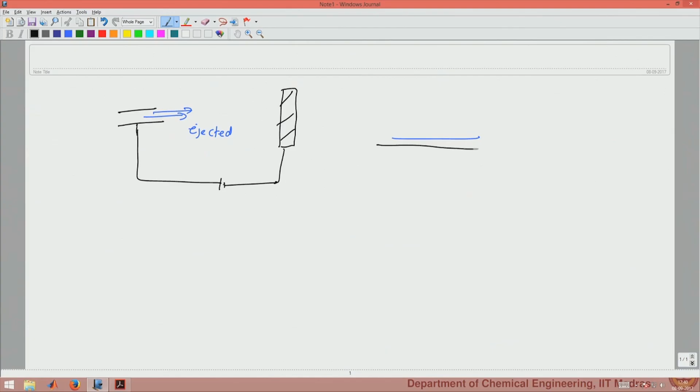This porous film is useful, as I said, in terms of various applications such as biomaterials and filtration. In this kind of problem, flow and rheology is extremely important, because our idea is to get a very uniform diameter of the jet that comes out.

Depending on the stability of the jet, there might be a regime in which the jet will have a few places where the diameter is large. Basically bead formation or spherical regions are formed in an otherwise cylindrical jet, and clearly this will modify the nature of the porous membrane made later on. If these are not well controlled, then electrospinning as a method yields a material which is not very well controlled.

In general, it is of interest to be in the regime without bead formation, and the possibility of this regime depends on several factors, and rheology is one of those. For example, it may depend on the flow rate used, and also on the surface tension of the fluid with respect to the surrounding medium. Based on all these, rheology of the material will determine what regime we are in.

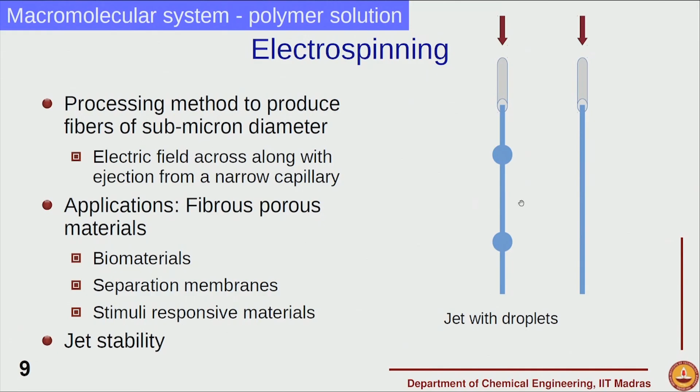So in these cases quite often polymer solutions are used. It will be difficult otherwise since polymer melt viscosity is very high, so generally solution spinning is used, and polymer solutions are electrospun into these porous membranes.

Now the next example that we have is of polymer melt. We use packaging films, grocery bags, and plastic bags all throughout for day to day applications, and all of these films are made using a process called film blowing. In film blowing, a cylindrical sheet is made.

Basically an annular sheet of plastic is made, and in the center of it air is blown. Because it comes out of an opening and air is blown at a high velocity, the cylindrical sheet actually extends and bulges out, and therefore increases in diameter and decreases in thickness.

That is how from a sheet we get a thin film, and the higher the stretching, the thinner the sheet obtained. To use it we can cut it, and then we have a very large polymer film available.

This is what we usually call polythene bags. They are made of polyethylene, which could be based on low density polyethylene or linear low density polyethylene.

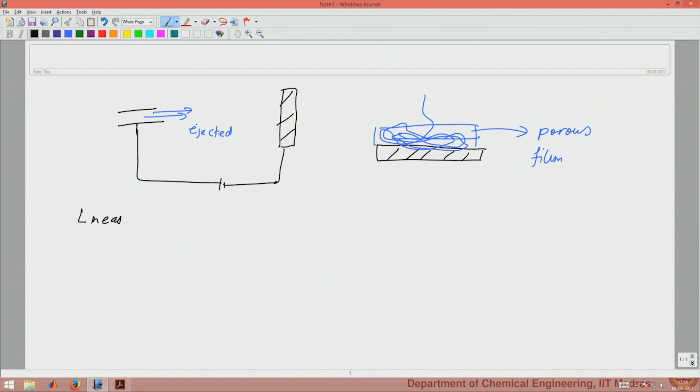Why these two materials are used is because of the extensional properties they have during such extensional flows. Linear low density polyethylene, called LLDPE, is basically largely linear with some controlled branches.

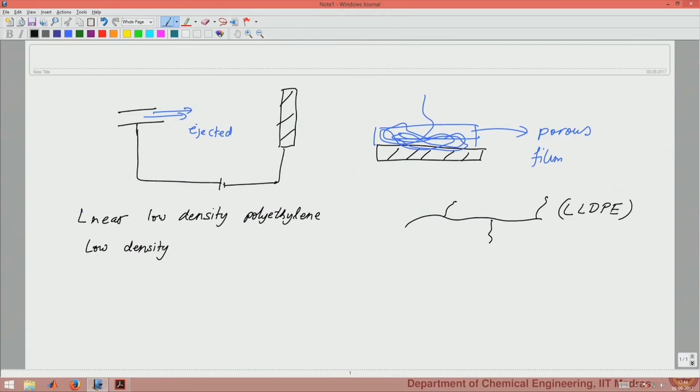Low density polyethylene, on the other hand, called LDPE, is very heavily branched, with very long branches and also uncontrolled branches. Therefore, in extensional flow, it has been found that LDPE is poor in terms of obtaining thin films.

While LLDPE has superior performance, and so clearly it is better to use LLDPE for getting thin films in such applications as opposed to LDPE. So many of the better quality grocery bags will be made of LLDPE, while other thin bags may be made of LDPE. In these cases what is required is a very high production rate, meaning we would like controlled thickness and very large area at a very high rate.

So extensional flow behavior of a polymer melt is of great interest in such applications, and again this is an example of material processing. The final product being used is a polyethylene bag, but film blowing as an operation is used to produce these bags at a very high production rate.

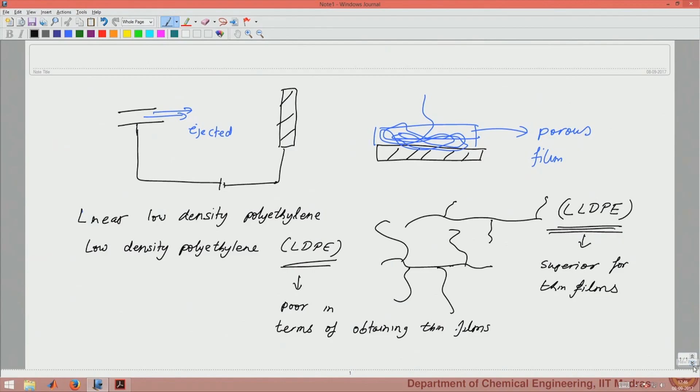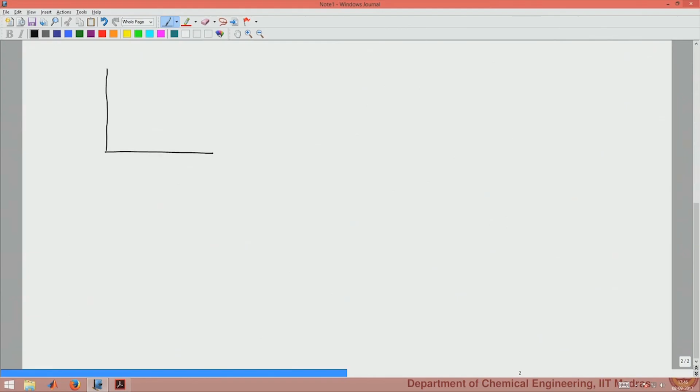Historically, the importance of extensional flow was also recognized through the analysis of such operations while trying to get higher and higher production rates. For example, it has been observed that if you have two different materials and you look at their viscosity, the viscosity may be very similar for both.

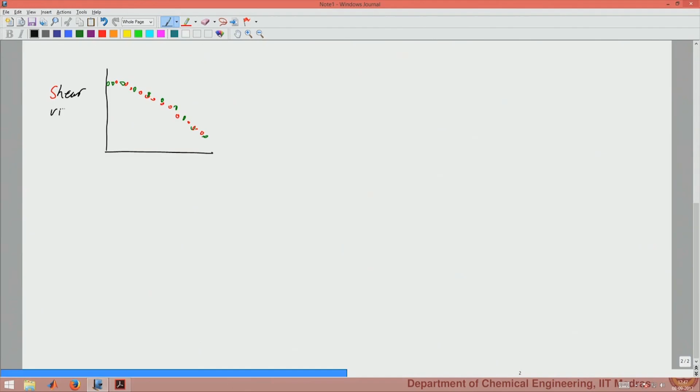So, for example, this is viscosity in shear mode, which we will define later on. So let us just right now say shear viscosity as a function of shear rate.

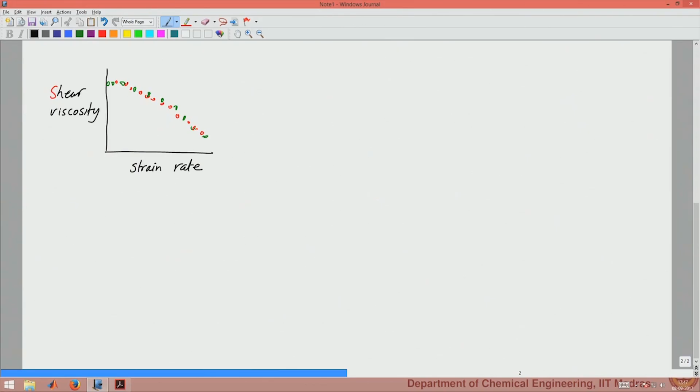So, these two polymers seem to show very similar viscosity, but if you look at the same two polymers and look at extensional viscosity, which is something we will define in our course, clearly there will be different behavior in extension and in shear. So depending on the material system, we may have one material showing a certain response while the other material shows a different behavior.

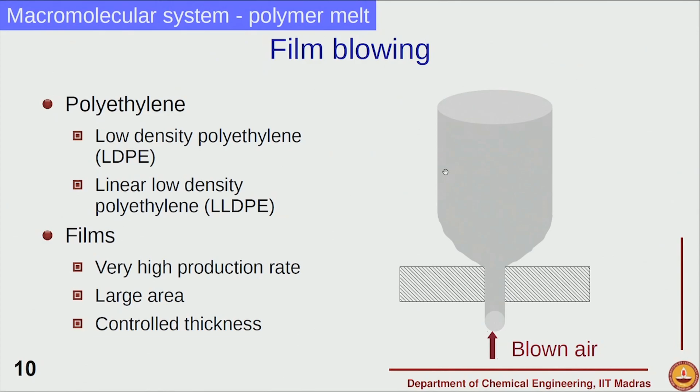Therefore, it is of interest to know the polymer melt rheology in shear as well as extension, to understand and optimize the performance for very high production rate.

The next example we will take is gel materials. In gels we have two different kinds of cross linking: physically cross linked polymer or chemically cross linked polymer. We are still looking at a macromolecular system. In the physical case, the polymers are bonded through hydrogen bonding or hydrophobic interaction.

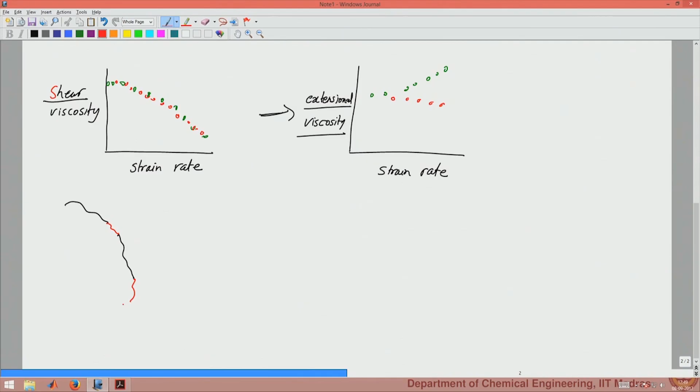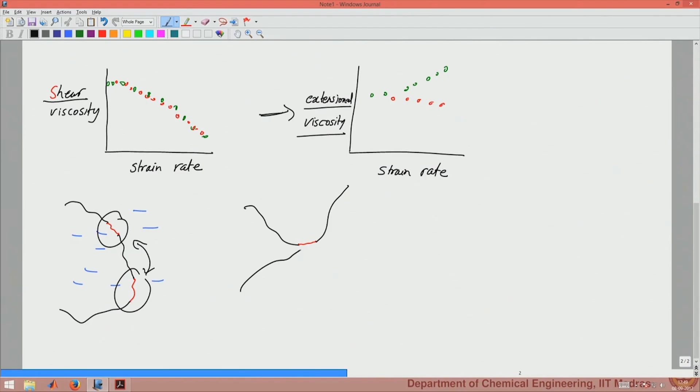For example, if all along the polymer we have periodic hydrophobic patches, these hydrophobic ends would come together, so these polymers are sometimes called sticky polymers. When you have this kind of polymer in solution, the hydrophobic patches would like to come together - this patch and that patch - and in the end you get a structure where the hydrophobic patch of one polymer comes together with another, and several such hydrophobic patches coming together is what is called a cross link.

So this is a physical cross link, because it is effectively linking several molecules, and therefore this is also a sticking point which connects them. Generally we will have cross linking points based on interactions such as hydrogen bonding or hydrophobic interactions, and these are depicted by these points here.

Polyvinyl alcohol is a common example of a hydrogel material. It is nothing but CH2-CH-OH, the vinyl alcohol group, with the same repeating unit repeating - a very hydrophilic polymer, soluble in water. But depending on the conditions under which we create the material, strong hydrogen bonding between different parts of polyvinyl alcohol can create these cross link points. So the cross linking is due to these points, and between two cross linking points we have the free chains, the giant dangling chains or segments of the polymer.

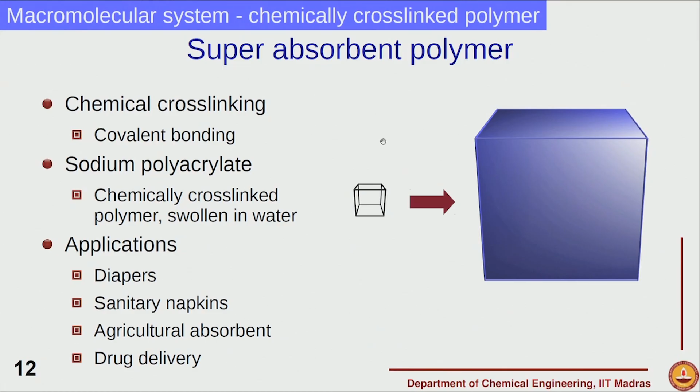These gel-like materials are very important from the point of view of their mechanical performance, and their properties in terms of strength - the load at which they tear is important - but also their properties in terms of what happens when we shear them or apply tensile deformation, and these deformations may not be very small. So what happens to these materials at large deformations, and what kind of viscous and elastic response they have, is of great interest for applications of different kinds.

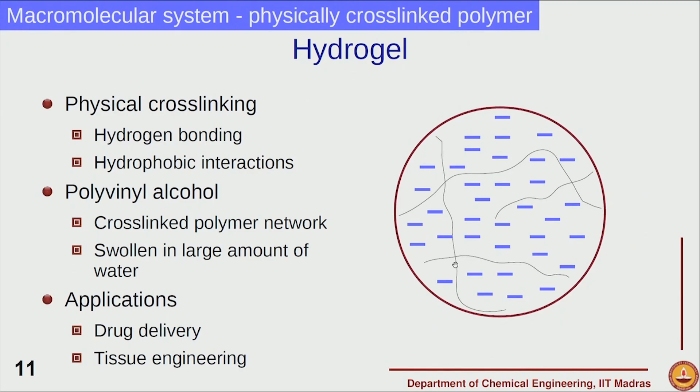The key feature in these cases is cross linking, and the degree of cross linking, and then the molecular weight of macromolecules between these cross links, is a fairly important feature.

So the next class of material, which is again macromolecular but related to a frozen sort of material, is below the glass transition. An example is polymethyl methacrylate, and the glass transition temperature for this is around 110 degrees Celsius. So at room temperature it is basically a glass, and as we learned in earlier courses, silica glass is a super cooled liquid.

So if you look at the overall arrangement of molecules, in this case macromolecules, the arrangement is random, but molecular mobility is practically absent below the glass transition temperature. So therefore macromolecules are frozen.

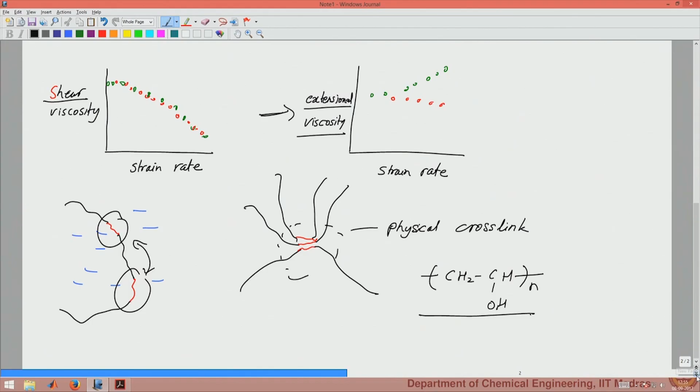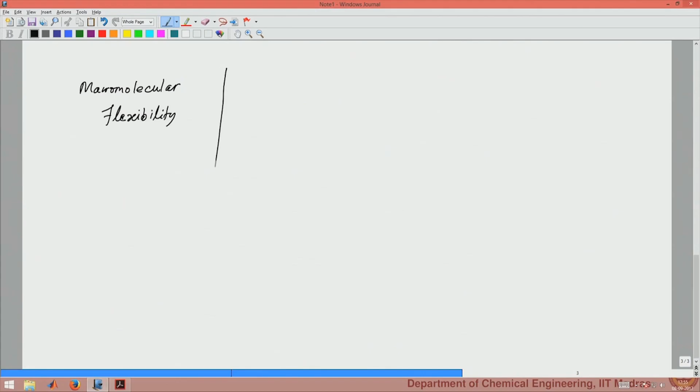So in fact, when we look at macromolecular flexibility as a function of temperature, we have several distinguishing features.

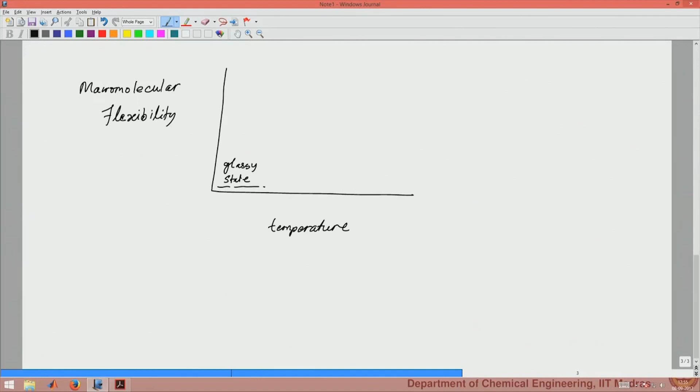Macromolecular mobility is very low in the glassy state because the thermal energy available is not sufficient for a segment to move. At most maybe a side group may be able to rotate. Of course bond vibrations may be present, just like in a crystal atomic vibrations are present. However, any motion of a macromolecular segment, for example a part of a macromolecule, is not possible.

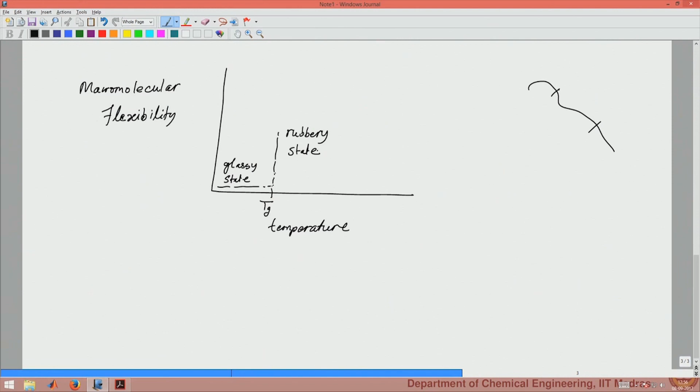Then beyond a certain temperature, called the glass transition temperature, there is what is called the rubbery state. In this case, because the polymer molecules are entangled between crosslinks, the polymer chains are free to move. So a polymer chain may explore different conformations as time goes by, and therefore there is molecular flexibility. However, the whole molecule may not have sufficient thermal energy for it to move.

Now beyond a certain point we go to the melt state, where the overall molecule can also move through reptation in case of a polymer melt.

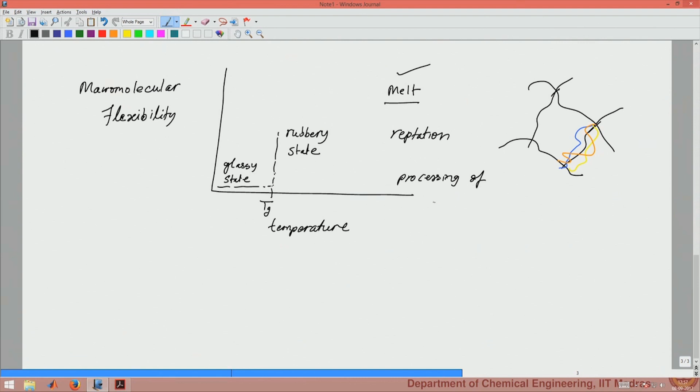The earlier examples of polymer melt we saw relate to film blowing, or in case of any processing operation like injection molding, polymer melt is involved. So this is where processing of the material happens, and this is where the performance of many structural polymer materials happens.

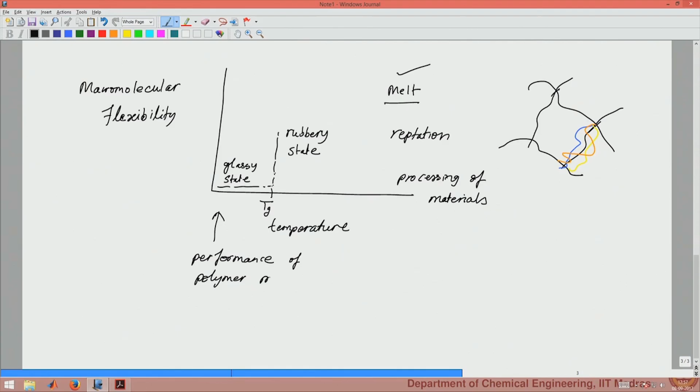So PMMA, which is used as a pipe, as a rod or a sheet, is of course used in its glassy state. So these materials are largely solid-like, but depending on the time scale of interest, they have several viscoelastic features. Given that the molecular arrangements and basic mechanisms are similar in the rubbery and melt state, the only difference is the time scales are very different.

So later in the course we will define something called relaxation time, and we will see that one characteristic of the glass transition temperature is that the relaxation times are extremely large, while in the rubbery and melt state the relaxation times are lower.

However, one can look at these transitions from melt to rubbery state, and rubbery state to glassy state, in terms of these relaxation times by doing rheological analysis.

Especially when it comes to long term property prediction, when we design a product for let us say 10 years of service life, many times it is not feasible to do the test over long term, even a few months. So in that case what we do is accelerated tests, and one key idea there is time temperature superposition.

So the tests are done at different temperatures over short duration, maybe just a few days or even hours, and then the data is extrapolated to one particular temperature for over years.

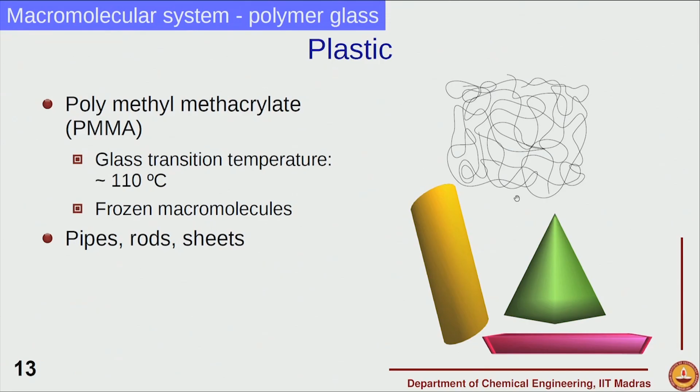So therefore rheology of polymer glasses is very important, and given that they are frozen macromolecular systems, the analysis of relaxation times in the glassy state is a very important investigation that still goes on.

So now, having looked at macromolecular materials belonging to the class of either solution, melt or glass, we will go on to look at similar materials in terms of particulate materials, which are multiphase systems. So in the next segment of the course, we will start with graphene ink and then look at several other particulate materials.